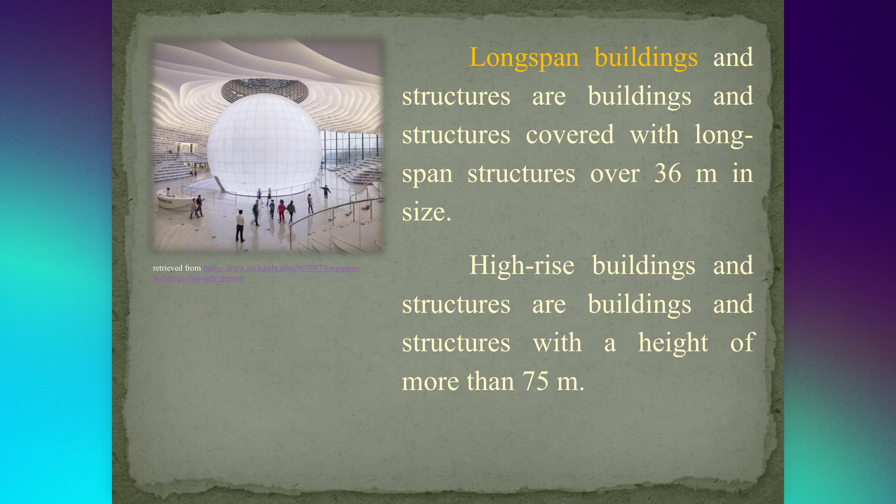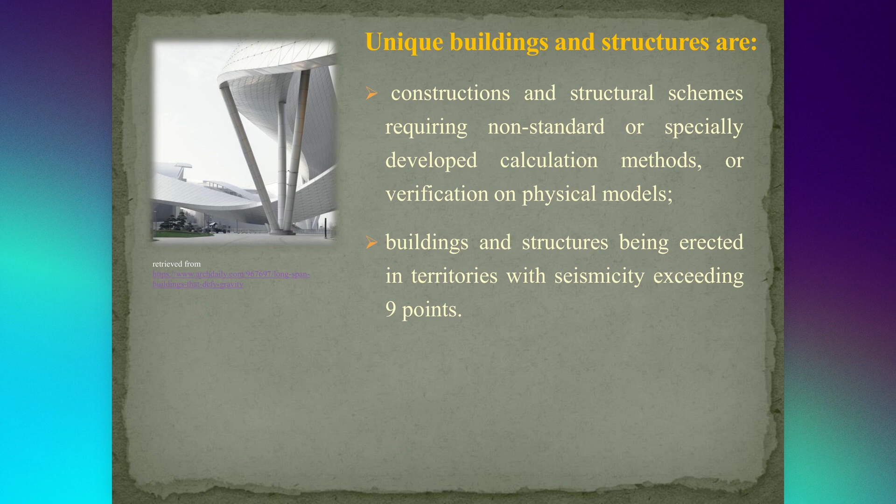Long-span buildings and structures are buildings and structures covered with long-span structures over 36 meters in size. High-rise buildings and structures are buildings and structures with a height of more than 75 meters. Unique buildings and structures are constructions and structural schemes requiring non-standard or specially developed calculation methods or verification on physical models. Buildings and structures being erected in territories with seismicity exceeding 9 points.

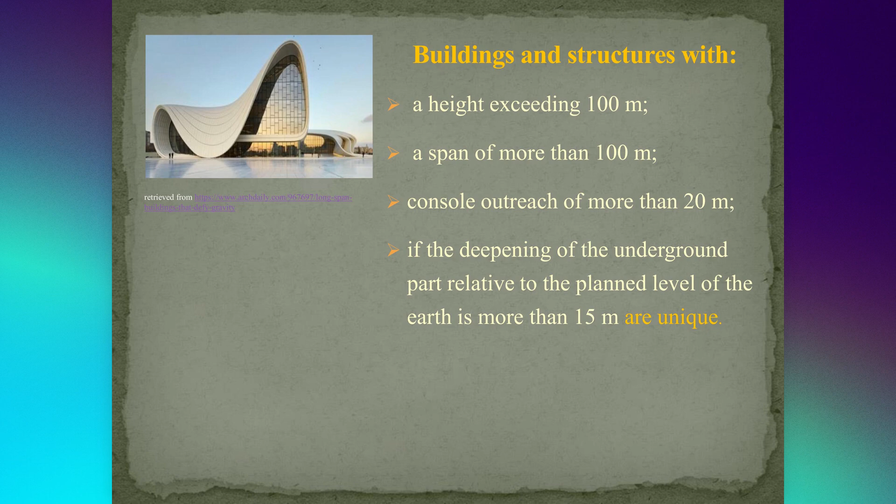Buildings and structures with a height exceeding 100 meters, a span of more than 100 meters, console outreach of more than 20 meters, if the deepening of the underground part relative to the planned level of the earth is more than 15 meters, are unique.

The start date of using long-span structures is the 19th century. This generated the need for long-span enclosures at a time when the technology of cast iron structures was sufficiently advanced to be able to provide them. Progress from cast iron to wrought iron, then steel in quick succession provided the means to build longer and larger structures. Long-span buildings create unobstructed, column-free spaces greater than 30 meters for a variety of functions.

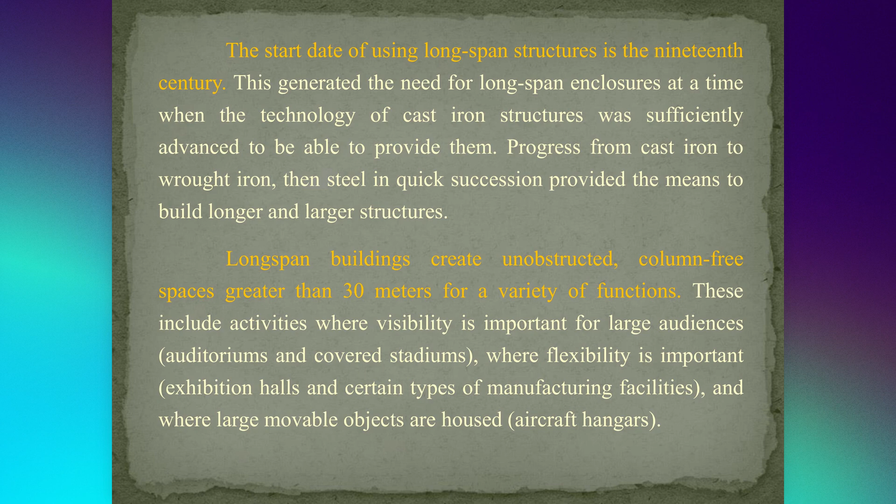These include activities where visibility is important for large audiences, auditoriums and covered stadiums, where flexibility is important, exhibition halls and certain types of manufacturing facilities, and where large movable objects are housed, aircraft hangars. Long-span structures are today widely applied mainly for sports buildings such as stadia, sports halls, swimming pools, ice tracks and skating rinks, and indoor athletics.

There is a wide range of different structural systems for long-span sheds. Steel is by far the most common structural material used in their construction. There has been an increasing demand for longer column-free spaces to provide maximum flexibility to the interior space. The structure can be clad in a variety of ways, with profiled steel sheeting a common choice. The design of large sheds provides a wealth of opportunities for the designer to explore technology. Large flexible spaces can be provided to suit a wide range of uses.

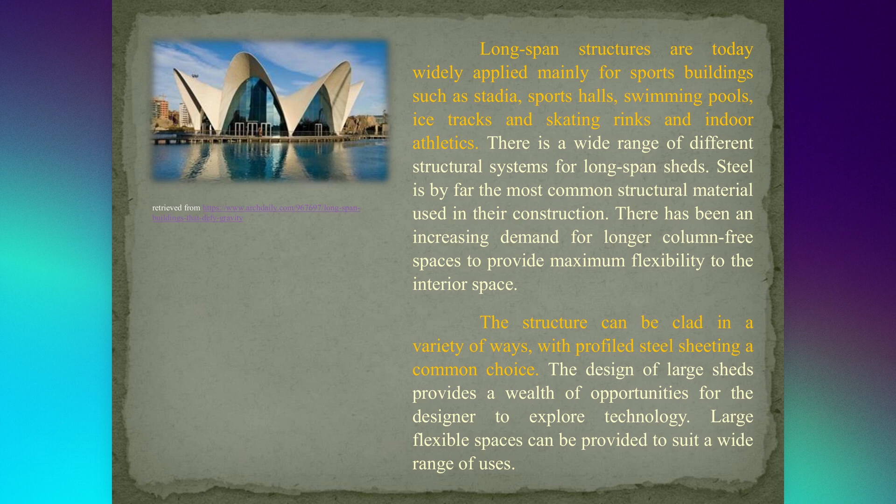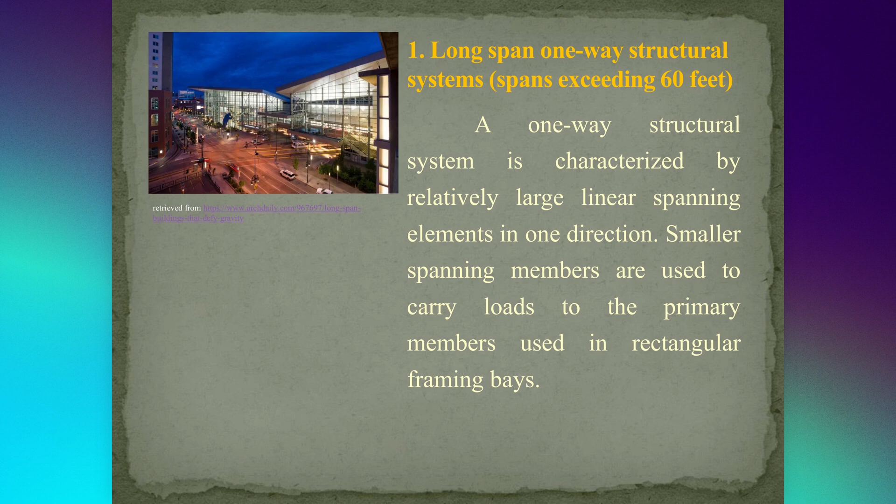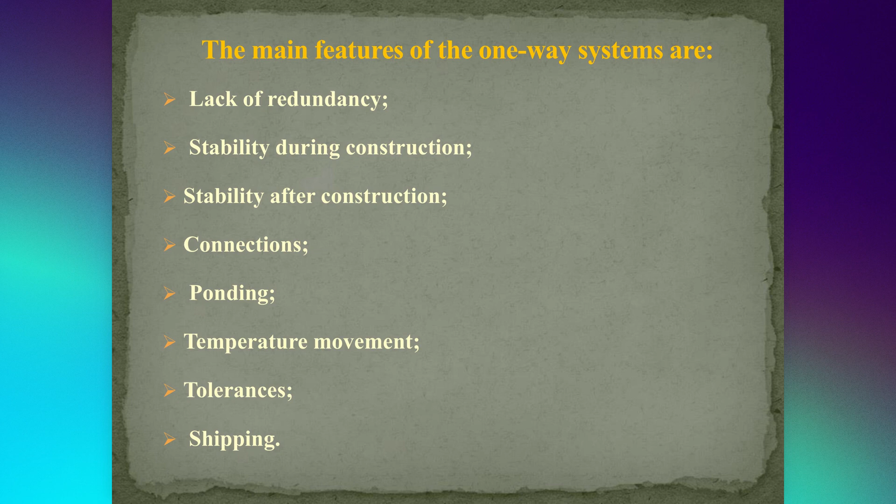Long-span one-way structural systems, spans exceeding 60 feet. A one-way structural system is characterized by relatively large linear spanning elements in one direction. Smaller spanning members are used to carry loads to the primary members used in rectangular framing bays. The main features of the one-way systems are lack of redundancy, stability during construction, stability after construction, connections, ponding, temperature movement, tolerances, shipping.

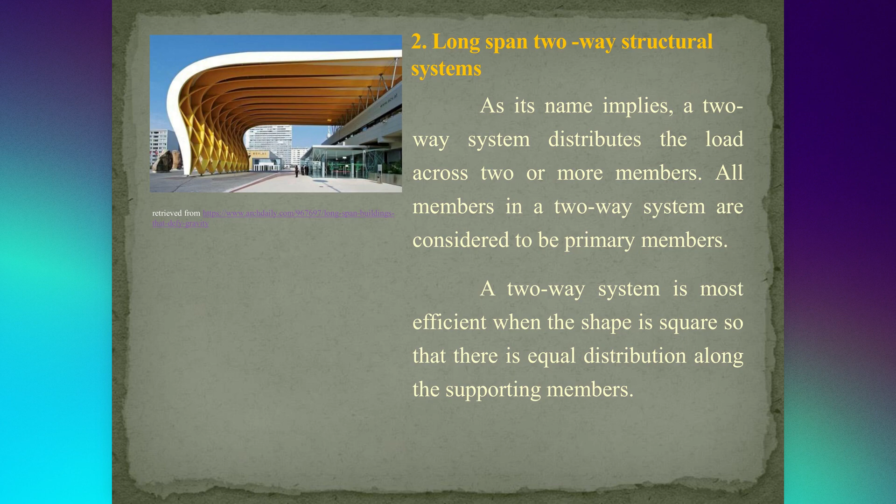Long-span two-way structural systems. As its name implies, a two-way system distributes the load across two or more members. All members in a two-way system are considered to be primary members. A two-way system is most efficient when the shape is square so that there is equal distribution along the supporting members. Types of two-way structural systems are space frame. Basically, it is a three-dimensional truss. Lots of redundancy is built into this type of a truss system.

Dome. Probably the most efficient structural system. A circular dome has vertical meridian lines that act like vertical arches in compression and horizontal hoops that act in tension. Thin shell structures carry shear, compression, and tension in the plane of the shell. These structures are deformation resistant based on their shape. Membrane structures. Similar to thin shell structures, membrane structures are also considered to be form resistant. However, these fabric-like membranes can carry tension only. They are extremely lightweight.

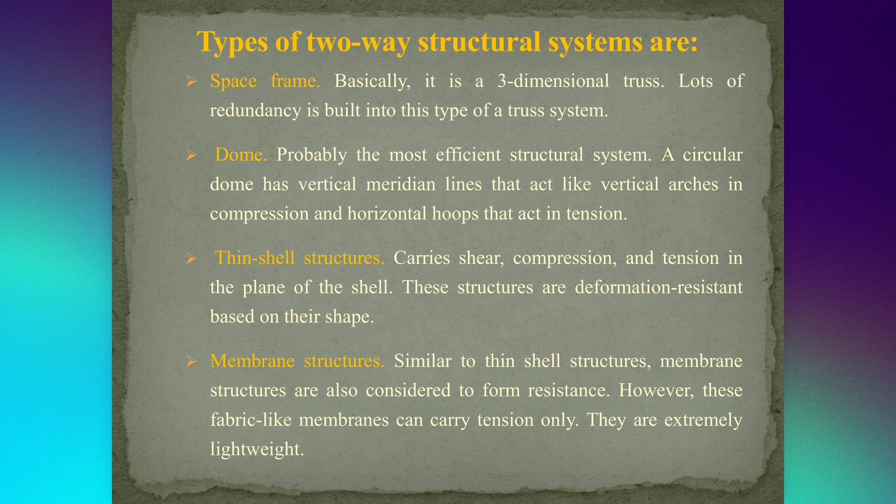Structural systems for long-span buildings can be classified into two groups: those subject to bending, which has both tensile and compressive forces; funicular structures, which experience either pure tension or pure compression. Since bridges are a common type of a long-span structure, there has been an interplay of development between bridges and long-span buildings. Bending structures include the girder, the two-way grid, the truss, the two-way truss, and the space truss. They have varying optimum depth-to-span ratios ranging from 1:5 to 1:15 for the one-way truss and from 1:35 to 1:40 for the space truss.

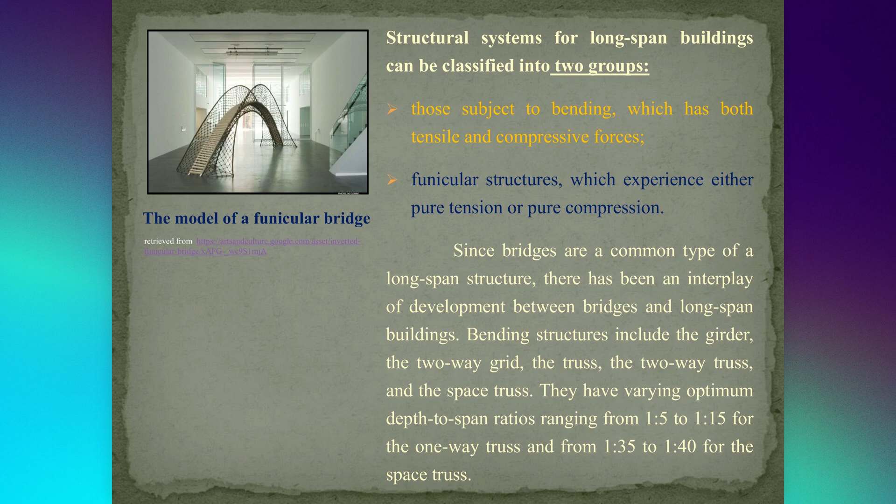The funicular structures include the parabolic arch, tunnel vault, and a dome, which act in pure compression and which have a rise-to-span ratio of from 1:10 to 1:2, and the cable-stayed roof, the bicycle wheel, and warped tension surfaces, which act in pure tension. Within these general forms of a long-span structure, the materials used and labor required for assembly are important constraints along with other economic factors.

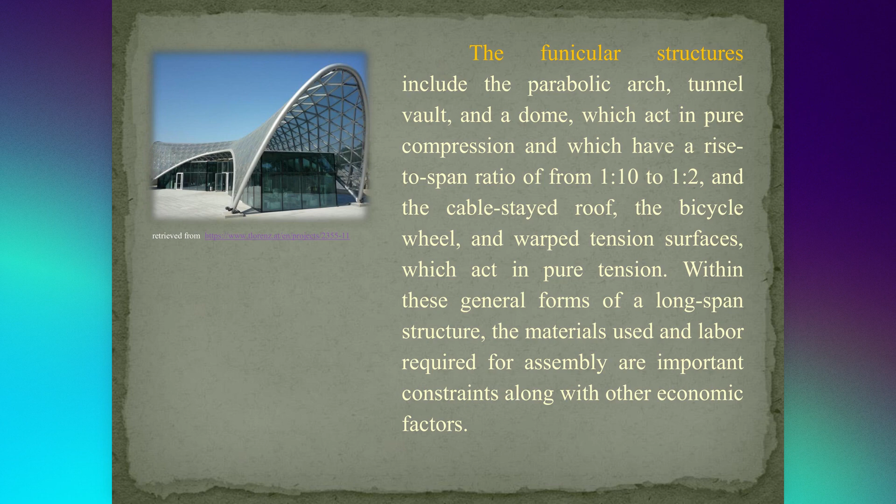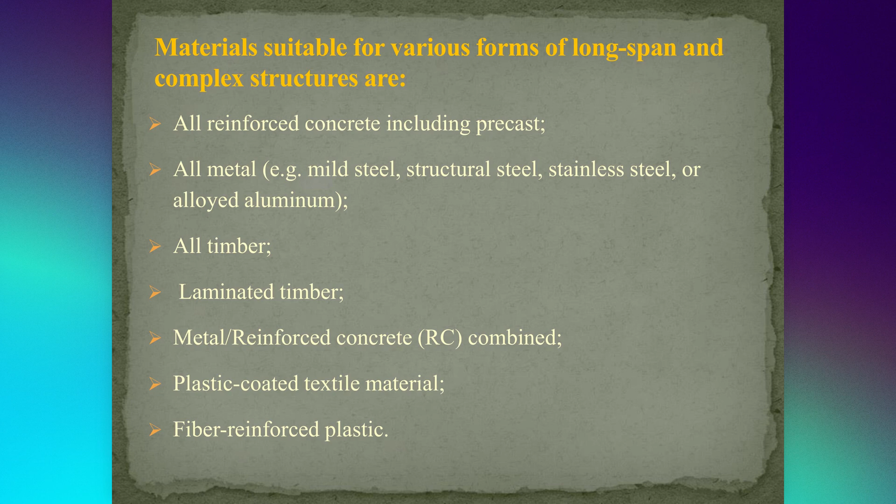Materials suitable for various forms of long-span and complex structures are all reinforced concrete, including precast; all metal, for example mild steel, structural steel, stainless steel, or alloyed aluminum; all timber, laminated timber; metal and reinforced concrete (RC) combined; plastic-coated textile material; fiber reinforced plastic.

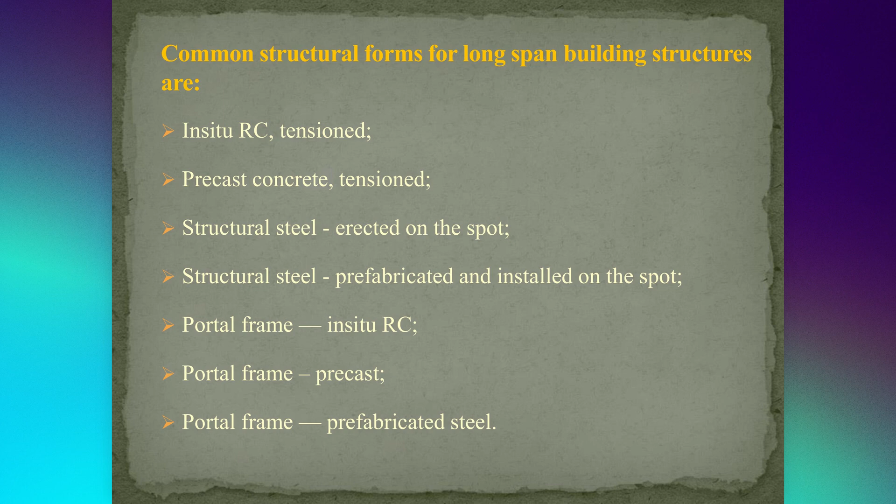Common structural forms for long-span building structures are in situ RC tensioned, precast concrete tensioned, structural steel erected on the spot, structural steel prefabricated and installed on the spot, portal frame in situ RC, portal frame precast, portal frame prefabricated steel.